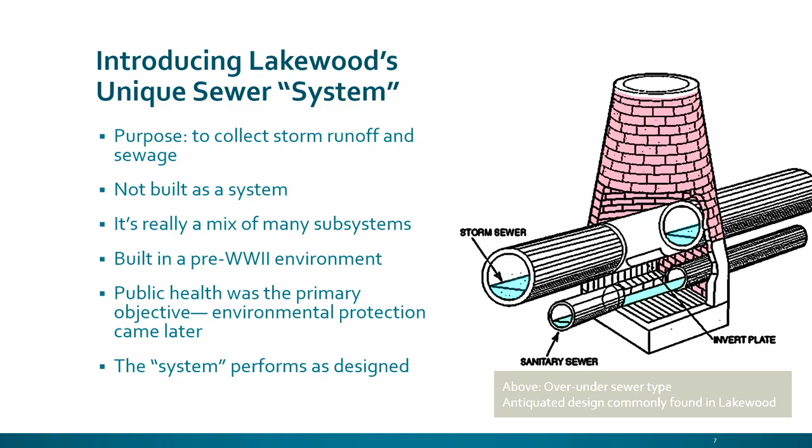And what's happened over time is Lakewood has built an Interceptor, knitted this together, has an outstanding wastewater treatment plant, but the unique sewers, the over-under sewers and how they fit together is unlike other places. That's what EPA recognizes. And so that's why we have a consent decree. It's a little bit different than most places.

This is just a schematic of how our sewers work. The bottom southwest corner of the city goes directly towards Madison and Riverside, and then down Riverside and comes across there where it overflows at that point. The rest of the city flows north eventually to the Interceptor that we're going to talk more about, and comes around under West Clifton and gets down to the plant where it gets treated.

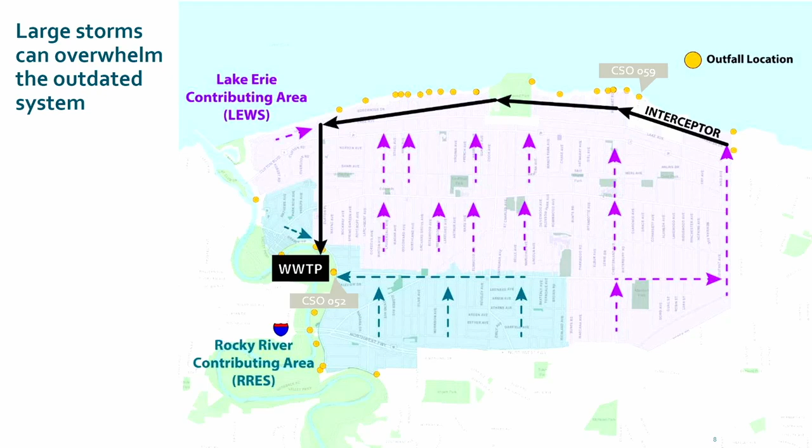Overwhelmingly, and most times, I think it's already something like 95% of all the waste on an annual basis in Lakewood gets treated at the wastewater plant. In big events, this old system that was intended to overflow overflows a mixture of waste and stormwater.

This graph is from 2018 when we had the public meetings, and this was when we were putting the plan together for our IWWIP. And what it shows you there is this at the time. This doesn't include the improvements we've made since, but the size of the dot is the volume of the overflow that happens. The more red it is, the more concentration of pollutants. And then it's listed there as activations: how many times in a modeled typical year does it go off?

And so this is what we showed the Lakewood community, and when people prioritized projects, they wanted to get those big red dots first. And that's what we put in our plan, and that's what's in the consent decree. I just want to point to one example of how far we've come already since 2018. Right up there by Lakewood Park, you see the one just to the east of Lakewood Park. It says 82 activations.

Because of the project the city did in integrating the street with stormwater and with new water lines on Lake Avenue, remember that two halves were torn up for 2 years. Those 82 activations are now down to 1 or 2 per year. Because we had this plan, our other work took care of it. We got 2 for 1, if you will. We got compliance and better performance because we knew what work we wanted to do, and we were able to put that into a street project.

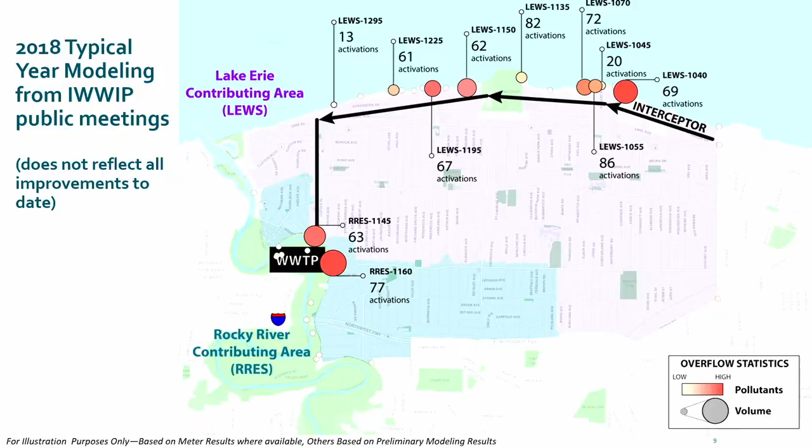This is the plan that's on the website, and this is what it's built around and has our schedule. It's available there. It's been adopted by City Council, like I said. I think it was this week in February of 2019. And it's the first in Ohio to be a fully integrated plan. Ohio EPA will tell you that.

In fact, Lakewood's been asked, and we've presented to both a workshop that Ohio EPA convened and one nationally that US EPA convened. They asked us to tell communities our size how to do integrated planning, why it works, what the benefits are. So Lakewood's been a model for that.

Again, what we approved for ourselves in 2019 and what this consent decree has really doesn't add new obligations. It's what we did for ourselves. If you look, it's the same projects under the same schedule. Some of it specified the size of some of the storage we're going to build with more particularity because we talked to EPA about that. It adds a sampling pilot project, kind of one of the first in the country, to see if there's a better way to measure how effective our projects are. We're going to see how that works out after these first 10 years.

And it builds in this pause then. We didn't give ourselves a pause under the plan to stop in 2031. We had work all the way through. What we negotiated with EPA has us plan that in 2031 we complete the last of the big projects that you saw there, and then we take 2 years, we do some post-construction monitoring, and we look at what our finances are at that time, as well as what technology is telling us, to see, okay, let's plan the rest of these under the right schedule and the right sequence.

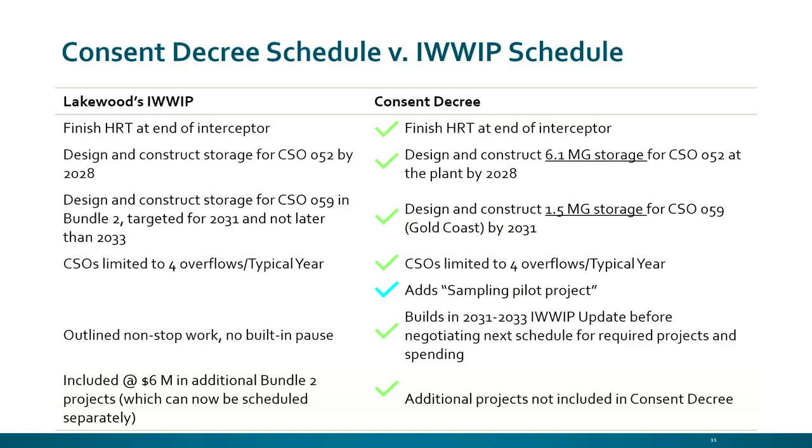This is really focused on doing the projects we said we're going to do. So basically, the regulators have confidence that Lakewood knows what to do and how to get things done. We've demonstrated that over this whole time, and that's what the consent decree tells us to do. Keep doing what we're doing.

There are risks and uncertainty. You know, this doesn't solve every sewer issue that we had. We found that with the Interceptor. The Interceptor needed attention, and you're going to hear about it immediately. It was something that was going to be somewhere in the long-term plan, but its condition said we have to do something now. There are, of course, long-term questions about what are some ultimate points of compliance. We're going to figure those out in 2033.

There are always the risks of any construction project or any planning that you do that you're forecasting out 10 years. Is inflation going to be high for 10 years? Is it going to be high for 4 years? Is it going to come down next year? Those are some of the risks of the costs and the timing that we have in there. But we have the ability to work that out.

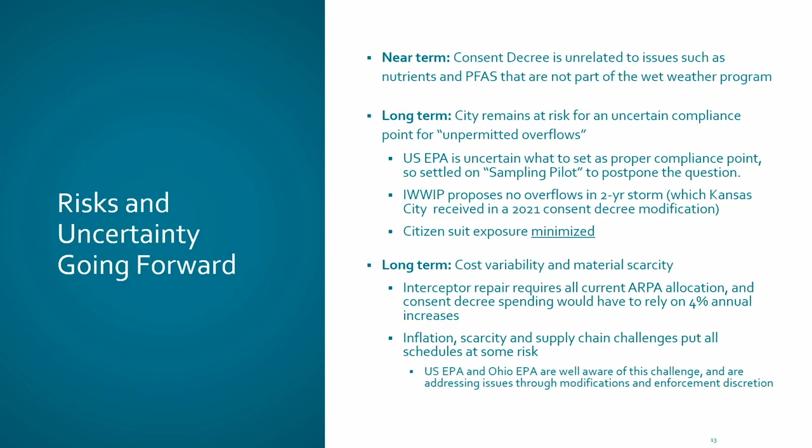Council passed a resolution to approve the consent decree and directed the mayor to sign it, I guess it was October 3rd. It was this fall when it was ultimately all signed. I think it was a September 26th meeting that council approved it. The city signed it and also directed some updating of the plan to conform to the consent decree with the minor changes. This was the process that went to approval. So the way it worked, we got the filing of the consent decree in October. We got a whole bunch of press. We got a little misinformation.

But the fact of the matter is we got this put in front of the court, and it was set up for public comment. They have a public comment period. There were no comments entered. A lot of controversial consent decrees where people have been fighting over stuff get a lot of public comments. There was no public comment.

And when the public comment period closed, the Department of Justice moved for entry of the consent decree by the court, and the court had a status conference just on January 30th, and Judge Oliver was very happy with where things are going, and on January 31st, he signed it, which made it effective and operative. So we now have an effective consent decree.

So that is what a consent decree is, a little bit of what it isn't. It's not a penalty in its own right. It wasn't punishment that we're doing $84 million worth of projects. We said we were going to do $84 million worth of projects, and under that schedule. All the projects that are laid out there were what we said we were going to do. And so Mark Papke now is going to give a little bit of update as to the specifics on some of those projects and where some of the dollars are going to environmental improvement here in Lakewood.

Mark. Thanks, Lou. I'm going to grab the mouse here real quick. Good evening.

We've already started on these partial consent decree projects. Those namely are dealing with CSO 002, 052, 059, as well as complying by doing some sewer lining each year and other IWWIP improvements. So we're going to talk about the status and where we're at with those. So CSO 002 was the first one that we saw in one of our NPDES permits that gave us a timeline to complete the project. So it's down by the wastewater treatment plant.

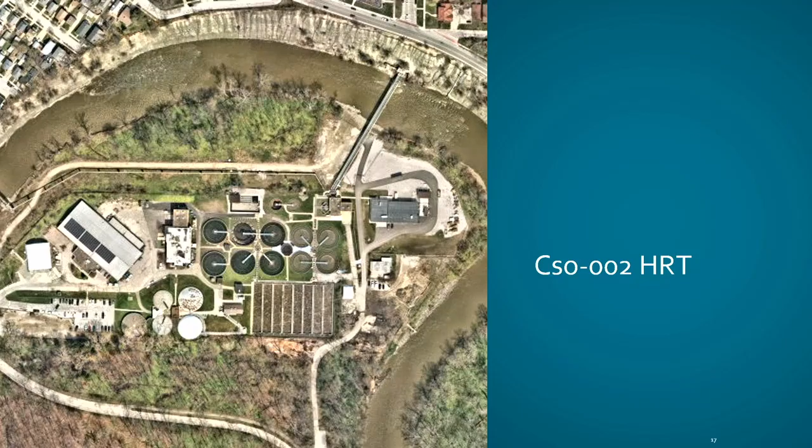Ultimately what the high rate treatment system does is basically it treats a drop of CSO water in 20 minutes versus going through the whole wastewater treatment plant, which takes a drop of water about 24 hours to get fully treated. So the project started in 2018 with the construction, and we started the HRT up in April of 2022. Thus far, we've treated 35 million gallons of CSO water, and basically have limited the activations at CSO 002 to virtually nothing in 2022. We're in the commissioning phase of that and dialing it in, and it's working quite well.

Okay. Yeah. So CSO is a combined sewer overflow, and the HRT is a high-rate treatment system facility. Thanks for asking that question. I was going to have him do exactly that, so I appreciate it.

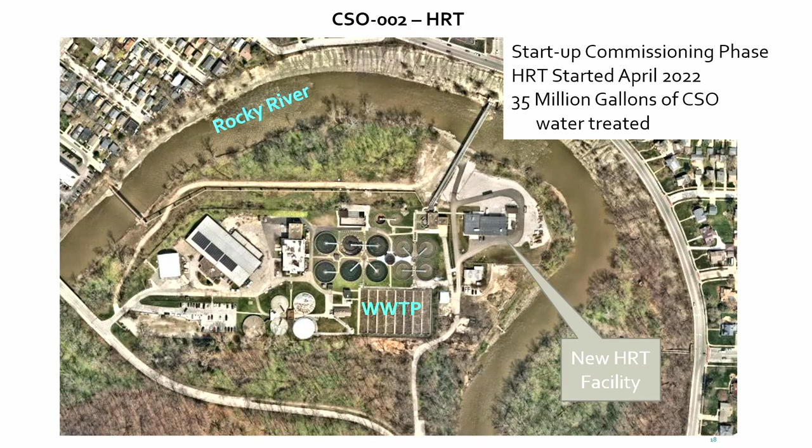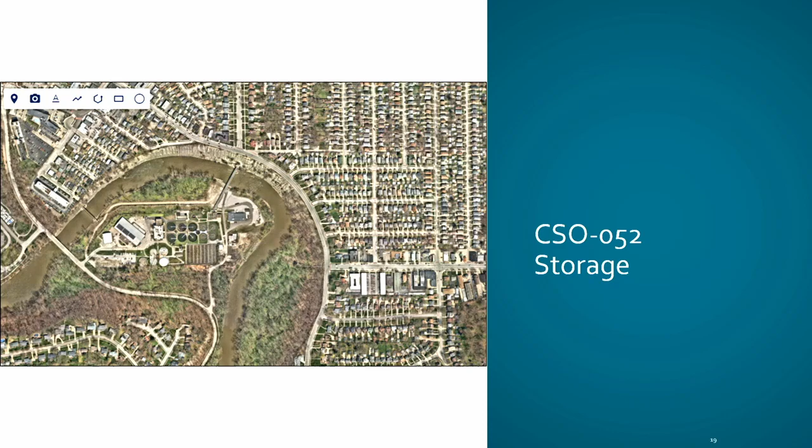So our next project is CSO 052, and basically, if you saw that graph that Lou had up before, it showed that the southwest quadrant of the city has its own drainage area, and this is known as CSO 052. It's a rather large area, 588 acres, and it goes to the wastewater treatment plant, but whenever the system can't handle the water there, it's discharged right to the Rocky River. And this was, through our task force, through public comment, the next highest priority CSO that needed to be addressed.

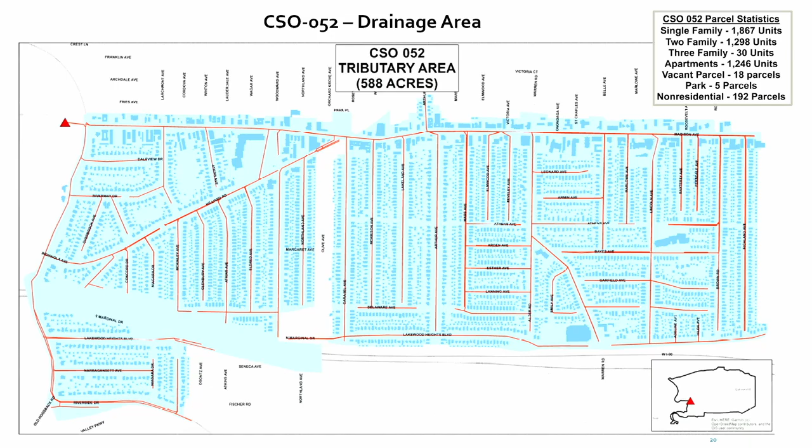So basically, during normal flows, all the water and sewage is coming down here and normally comes along Riverside to West Clifton and then over to the wastewater treatment plant for treatment. And basically, at the wastewater treatment plant, when we can't take on that much flow, it comes out here to the Rocky River.

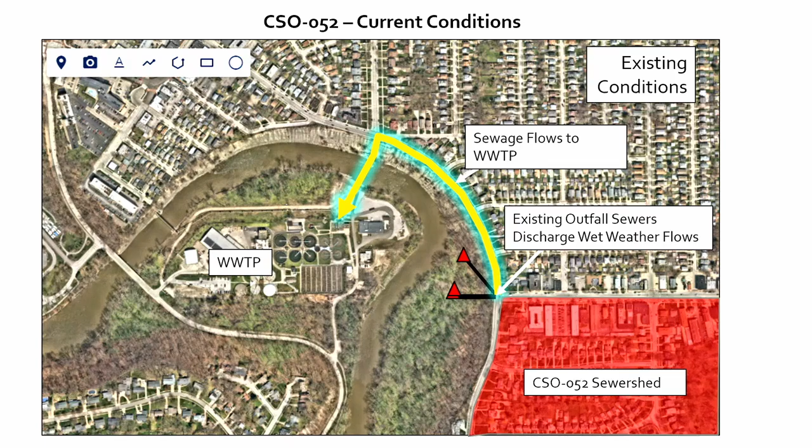So currently, we are planning on installing a 6.1 million gallon storage tank down at the wastewater treatment plant. And basically what it's going to do is take those flows, instead of going out to the river, to a diversion structure and then over to that tank. And then once the rain event has subsided and the plant has capacity, the storage tank will be drained for full treatment at the wastewater treatment plant.

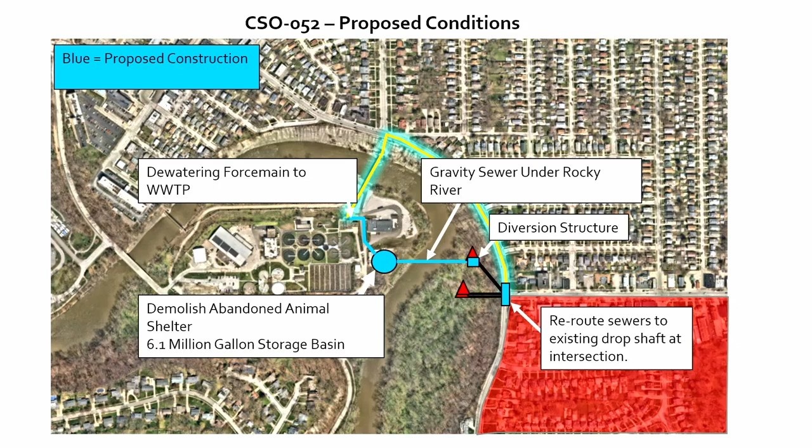So the project schedule, we've completed the flow monitoring and pollutant sampling. The preliminary engineering and basis of design report is 95% complete, and we are starting the final design and permitting that should be completed in June of 25. We're planning for construction to commence in January of 2026, and construction being completed in January of 2029. The estimated cost right now at the preliminary engineering stage is $22 million for that project.

And with adding in the tank at the wastewater treatment plant site, basically that's where the current animal shelter is. So right now, our intent is to move the animal shelter over to by the refuse site that's currently being expanded and we're working on, but basically we'll be getting that animal shelter built there once we demolish the existing refuse building.

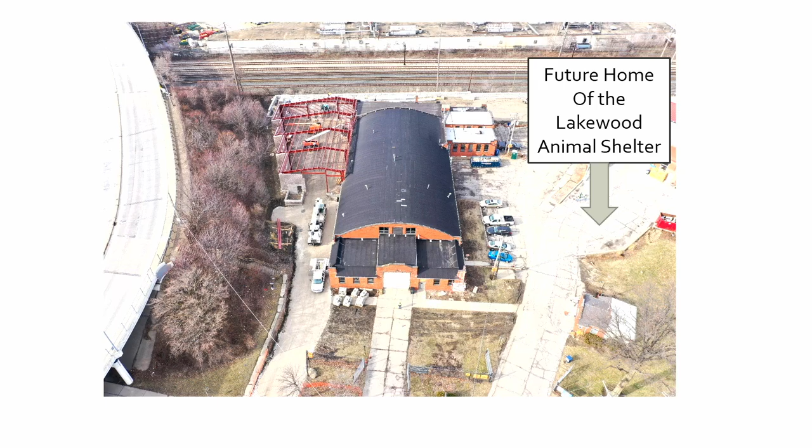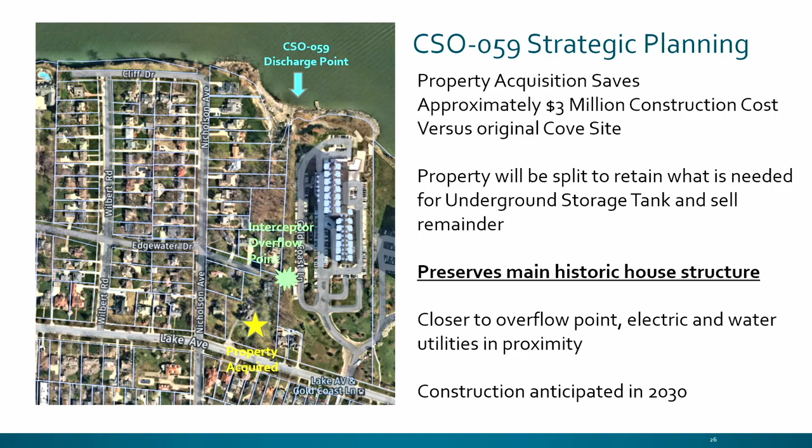We ran a lot of construction cost estimates and determined that we could save $3 million in construction cost versus the original planned site at Cove. The property will be split to retain what is needed for the underground storage tank there, and we'll sell off the remainder, which would include preserving that historical structure which the previous picture has. It's a beautiful historic house here in Lakewood. It's closer to the overflow point. It has power there and water utilities, and construction's anticipated in 2030.

So the project schedule for that really will be kicking off in June of '25, getting the flow monitoring and pollutant sampling, working on final design and permitting in July of '26, and then starting construction in June of 2030, and will be completed in January of 2032.

Water and sewer projects that we're working on. So as a part of the IWWIP, there's strategic areas where we are going to be doing manhole separations, and I'll show you a little bit about that. But you can just see the magnitude that it takes for us to do these manhole separations. It takes up a good chunk of the street. And a lot of these are in residential neighborhoods.

So we are doing a lot of public outreach on these projects. And we ask the residents just to be patient. We're trying to solve some problems from the early 1900s and improve the infrastructure.

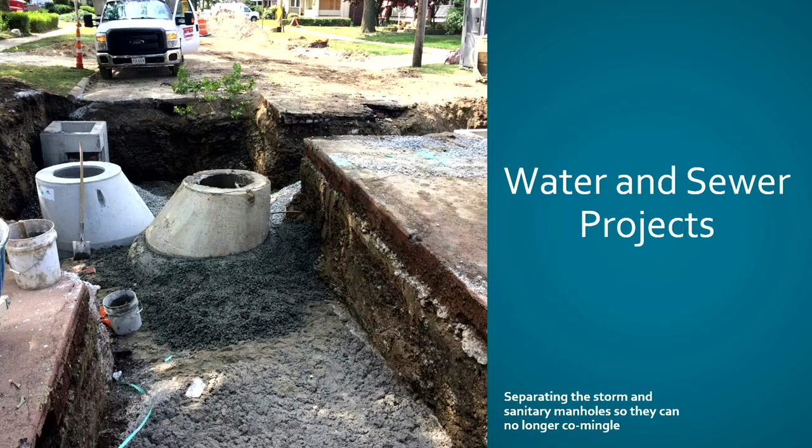So with our water and sewer projects, from the previous slide, these are the manholes that are getting separated. We are lining the sanitary sewer main, and that helps reduce the amount of groundwater and I&I getting into the system, which helps reduce the amount of overflows. And then we're adding in this new sewer, we're bumping the storm out, and then with those projects, we're lining in the right-of-way the sanitary lateral and providing new test tees, and then also for the storm, we're removing the P-traps and providing a new test tee there.

And then this shows our new water main that we include with these projects. So we're really trying to do like a complete street, so that once we hit the streets, we're putting in a new water main, we're getting all this infrastructure done and preparing that street so we don't have to come back 10 years later and rip it up.

There are some areas though, for instance Gladys, that's under construction right now. We weren't able to separate the sewers at this time because other IWWIP projects have to be done ahead of that so that we don't negatively impact basements with water. So projects that have already been completed is Lauderdale. That was completed in '21 and '22. And then Andrews and Gladys, which is currently under construction.

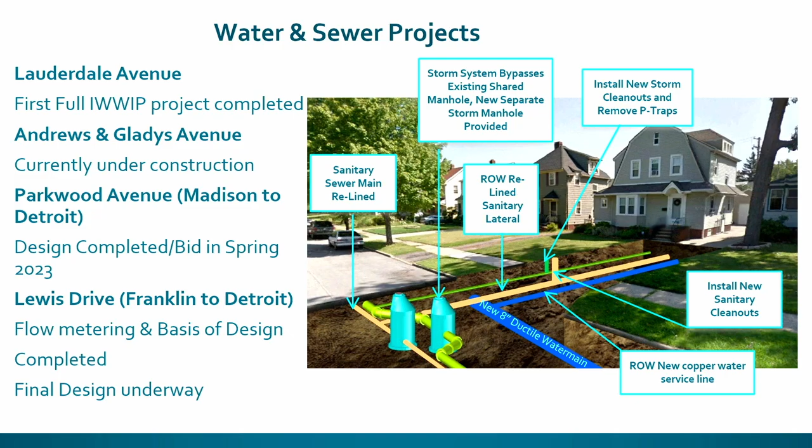The Interceptor Rehabilitation Project. So as Lou was talking before, the Interceptor here was originally built between 1918 to 1940. It carries 77% of the city's sanitary and combined sewer flows. It's approximately 20,100 feet in length.

At the east end here over at West 117, it's approximately 20 feet deep, and it stays relatively between 20 and about 30 feet till we get to the intersection here at Clifton and West Clifton, where then it really starts diving down where it meets at the wastewater treatment plant. We're 90 feet deep. There are currently 34 manholes that are along the Interceptor.

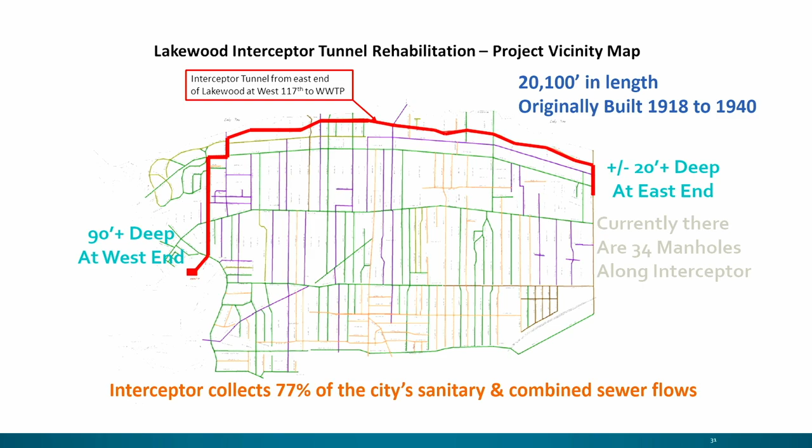And the proposed plan is to slip line the Interceptor. And basically what that entails is putting in a glass reinforced liner that's the shape of an egg, and basically pushing that into place and then grouting in between the existing pipe and the new pipe so that it has full strength.

With that project, we've identified 12 access shafts in order to install the liner, and they're variously placed strategically along the Interceptor route. With that project, we'll have a lot of utility temporary relocations at the shafts. There's going to be some traffic pattern changes there. And each shaft, we're thinking that it's going to take approximately 3 to 4 months to complete. And we'll be rehabbing these existing manholes.

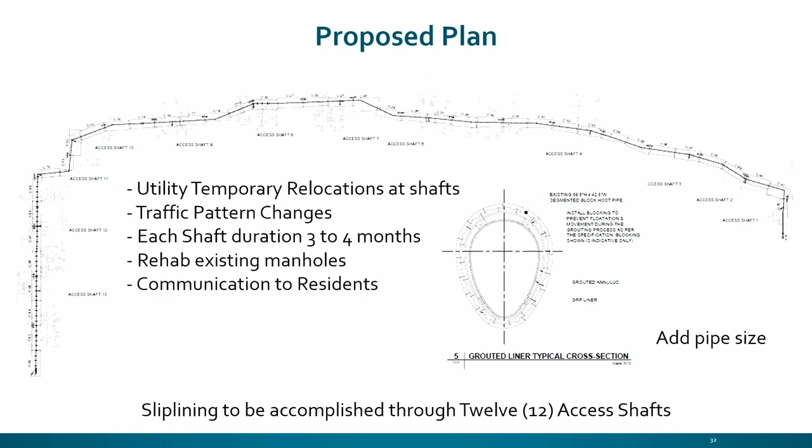And the big thing with this project is a communications plan. We have put that together. We have a team that just works totally on the communication plan. We do have a website for the project as well. But it's a pretty massive undertaking. The project is approximately $26 million to completely rehabilitate the Interceptor.

Our bid opening is scheduled for March 9th. We're hoping to have the contract awarded in April, and we think that it's going to take approximately 2 years to complete. The construction costs are $23 million. Our funding sources are the ARPA, American Rescue Plan Act funds that we received, as well as we have funding from the Ohio Public Works Commission.

You can view the project's website page that has a lot of details further of the project, and it'll actually keep a running total as we're completing work. We'll be updating that. So we encourage you to take a look at that if you're interested. And then I'll kick it back over to you, Lou. You can go to the next slide, please.

So part of what you can see, these are really significant, massive projects. This is kind of a program on the scale of when we rebuilt all the schools in Lakewood. It took many, many years, and it took a community effort and support for it. And it's going to be on that scale, and it's going to take decades to do it. I work with a lot of communities around the country. Very few of them have this kind of public engagement and support.